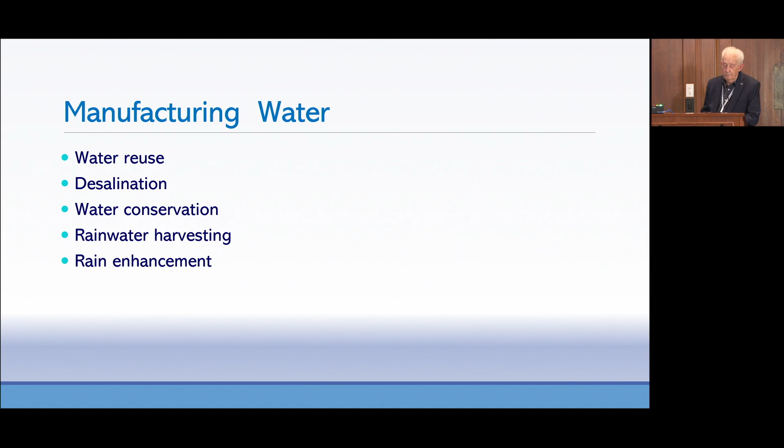So because of the growth of population and the growing need for water, there was no other choice for Israel but to look ahead and start manufacturing water. So we have a big water manufacturing factory, which is the most major contributor to it. It started with water reuse.

The Shafdan, which is the largest source of wastewater for irrigation, started around the end of the 70s, and many hundreds of small projects followed in different regions and areas for water reuse. Also in the cities, urban water reuse has been developing, like in my town, Herzliya. There is a very nice park which is irrigated with reused water, and so in other cities around Israel.

There was a lot of marketing of water conservation, mainly at home, behavior of people. Water conservation found itself very efficient in Israel - a lot of small apparatus used in showers, toilets, and other places at home. But if you take the total amount being conserved or that could be conserved, it's not more than one big desalination plant, for example - but still the culture is being kept very, very nicely.

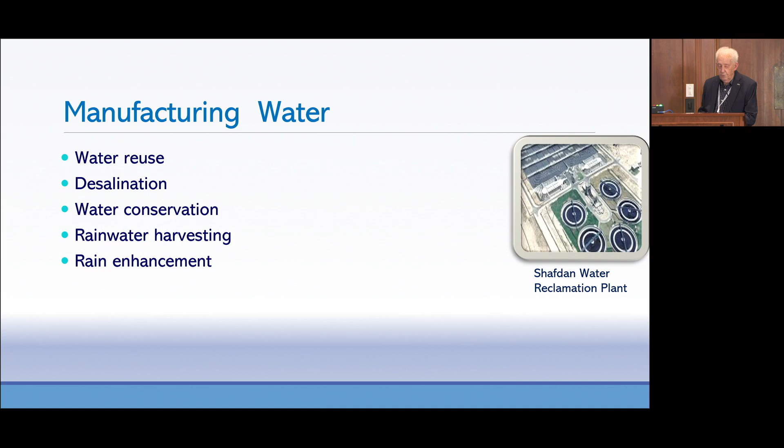There are also plenty of innovations, like taking water from the air, using different brines, even different types of sludges. But I would say most of the extra water comes from desalination. You can see here desalination and water reuse. The Ashkelon plant was the first one that started to work around 2004 or 2005, and not very far from there is a brackish water plant.

There are several, only very few plants like this, but again, as you can see here in the conference, there is work going on to get more and more brackish water desalination inland.

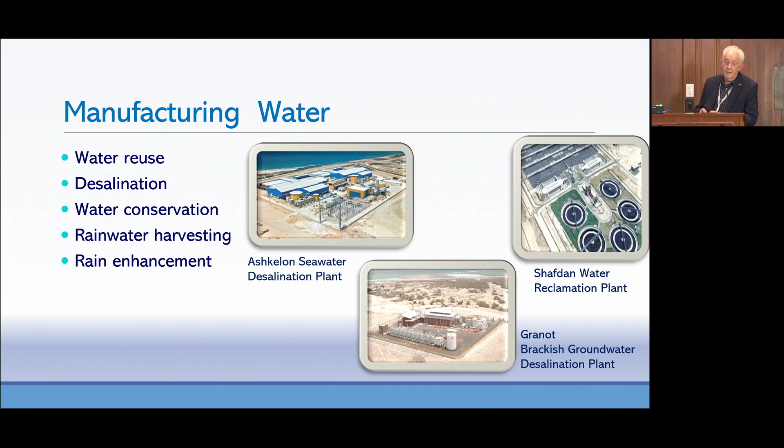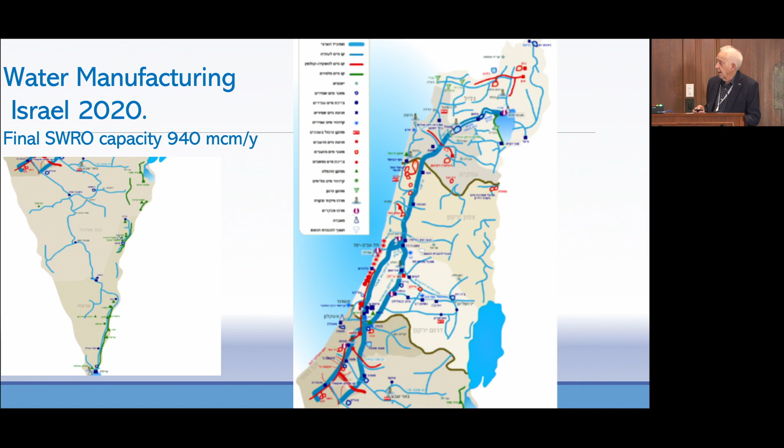Now you can see also what you see in red are different projects which reuse wastewater. The largest one is... where is that?

Tel Aviv is here, and the project of Shafdan starts from here. It collects the water from a population of about 2.5 million people, Tel Aviv and the satellite cities, and takes it down about 100 kilometers for a large area of irrigation.

Around Haifa in the north, there's also a project, much smaller, but still reusing Haifa and the Bay wastewater. And also Jerusalem, there is a reuse of some of the water to the east and some to the west. Near Beersheba, in the middle of the Negev, the south part of Israel, down to Eilat, there are different projects, but relatively small size.

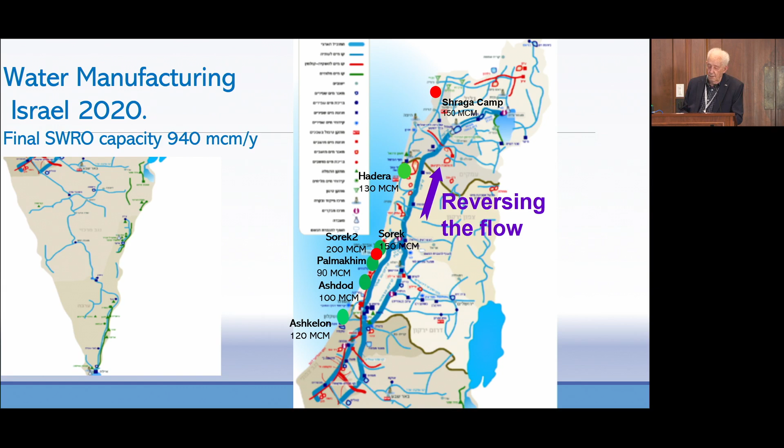Today, actually, in the past, before desalination started, most of the drinking water came about two-thirds from groundwater and about one-third from the Lake of Galilee, some surface water. Today, only the Galilee in the north gets water from the Lake of Galilee.

Now, if we look at the whole picture of what is going on in Israel, I think the best thing to do, and not only in Israel, would be to look in a holistic manner when we use, when we plan, when we invest in the water.

There are actually two cycles here. On the left hand, we have the inflow of water, or production of water, from rain, from desalination plants—there are some two big projects of surface water collection and injection—groundwater, industrial water, not too much but still exists, and the reused water. All together, they give the picture of the main water sources in Israel.

On the other hand, you have the contribution of wastewater, most of which is being treated for reuse at a pretty good level. We can see immediately in this picture that all of it is getting together. I mean, wastewater is being used for irrigation, and some of the water gets into the environment, into the ground.

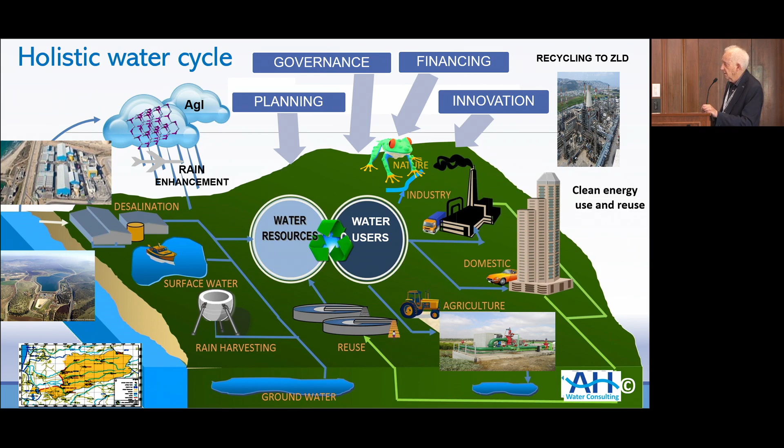Now, there are different contaminants in the water, similar to what you have here in the United States, and I don't need to go over every one, but there is a lot of care, I would say, about the water quality.

Today, some of the issues being brought here would be like microorganic contaminants. There are traces of medicines or hormones getting into vegetables, for example, very low quantities, but it's being investigated. PFAS is being investigated too, found in several spots in Israel. And all the rest, the biology, I think it's quite similar to what you have in the United States.

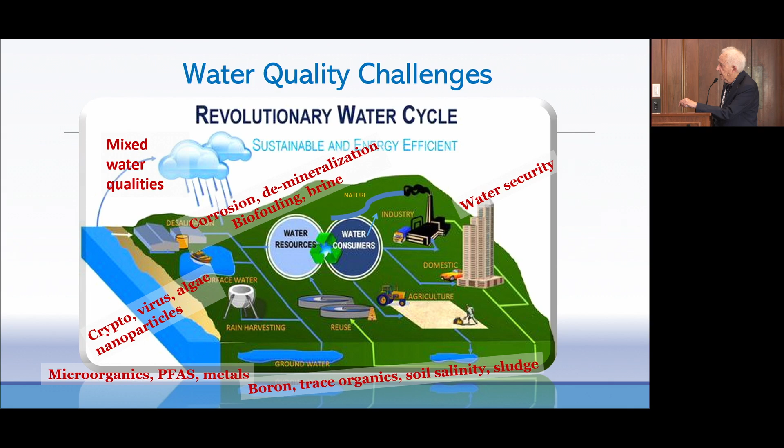Now, another subject that is very important in Israel is water security, and this has been taken care of in the last years. There are a lot of attacks from Iran and sometimes from Russian sources on Israeli treatment plants. In the United States you also have a lot of them. I looked at this topic too, and today there is special care on the topic of security. This has become an integral part of water management in Israel.

Now starting to talk about quality, one thing that was raised yesterday, and we had a very nice discussion, was the lack of magnesium and calcium in desalinated water. I mentioned it but didn't talk about it too much, but there has been research showing there is not enough supply of magnesium and calcium. In fact, even before desalination started in Israel, the calcium level intended for health was lower than what the WHO has recommended. This is a problem that is taking time to solve because of different obstacles, mainly money and, I would say, conservatism.

Another thing I'd like to point out, which also relates to climate change, is that in these years climate change can be very quick, fast and unpredictable. We are in an era of uncertainty. For example, there was a big drought in Israel, and there was not enough water for irrigation in the north of the Negev. So there was no other choice but to irrigate with desalinated water that came from the desalination plant in Ashkelon.

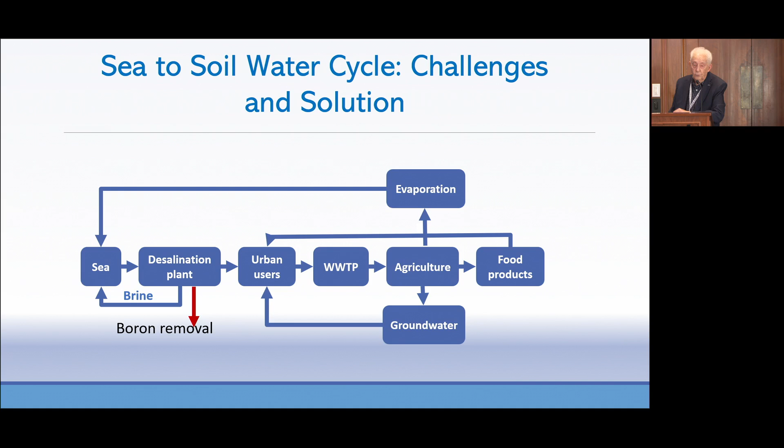This is a planned scheme of one of the cycles we see in desalination. You can see that from the sea, the water is desalinated, gets mostly to urban use, but after using it, it gets into the wastewater system and then goes to the wastewater treatment plant. There is no addition of magnesium, not at home and not in the wastewater treatment plant. It then goes for irrigation, and the plants don't receive the magnesium. Part of the water evaporates, part goes into the ground, and part goes for food, which lacks magnesium—this is a kind of internal cycle that happens.

Now, to get a solution for it, boron is removed, and remineralization happens to the water coming out of the desalination plant. It goes through calcite stone to give enough calcium to protect the pipes from corrosion, and it's also a good addition for the human body. There are limits, but the pH is being amended, and then it goes out without any addition of the magnesium that the body—our pipes in the body—need.

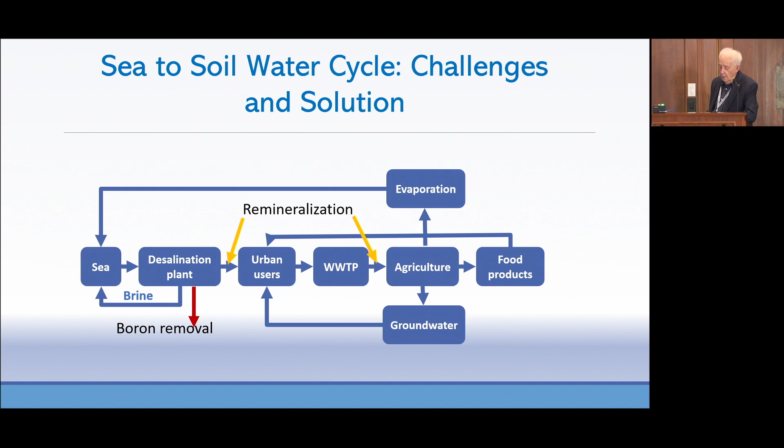I will say one word about monitoring. I didn't see much about monitoring in this symposium, but there are a lot of smart monitoring devices that have been developed in Israel. They are being used also in the United States, all over the world, and it is very helpful in order to manage such a complicated system.

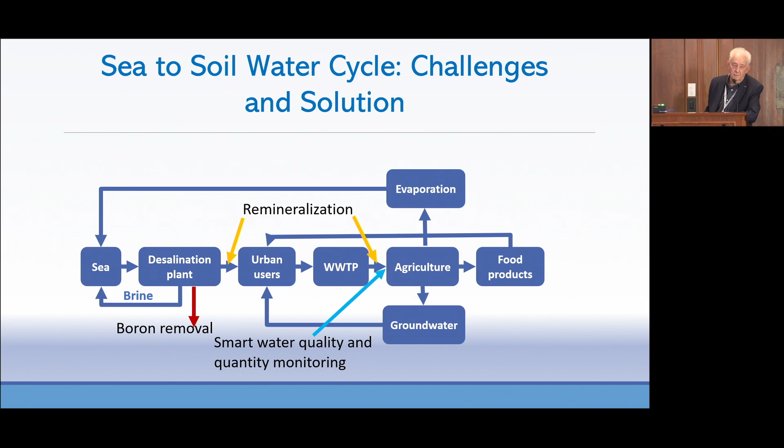I think we already saw the importance of water quality in this whole cycle. Actually, it's the regulation, the standards, that today dominate the management of water supply and wastewater reuse. This is because we have solutions, not in any country. In Israel, the sea is, I would say, like an endless source of water. Wastewater there's always, and it's growing, population is growing, but the quality is dominating today, which is a very big difference from the last century.

In the last decade, several amendments and advancement of regulation have been set up: water quality for irrigation, wastewater quality for disposal to streams, industrial effluent quality, drinking water quality, and desalinated water quality. And there are continuously standards being used for materials and equipment, mostly under the Israeli drinking water standards.

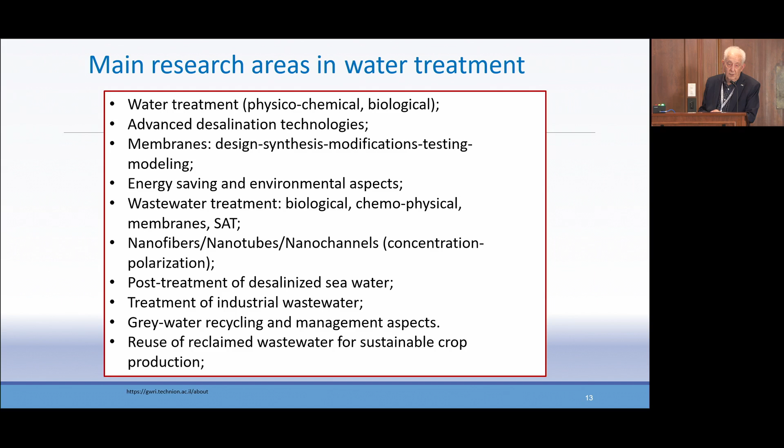So grey water has been also researched in Israel, and I think we are encompassing all what can be in water to treat it or try to treat it properly and have standards assigned to it. Now, Ministry of Science assisted me in getting more information. Although I'm sitting here and there on some committees, I looked at the whole picture. Each year or a couple of years, depending on the grant, there are calls for research proposals.

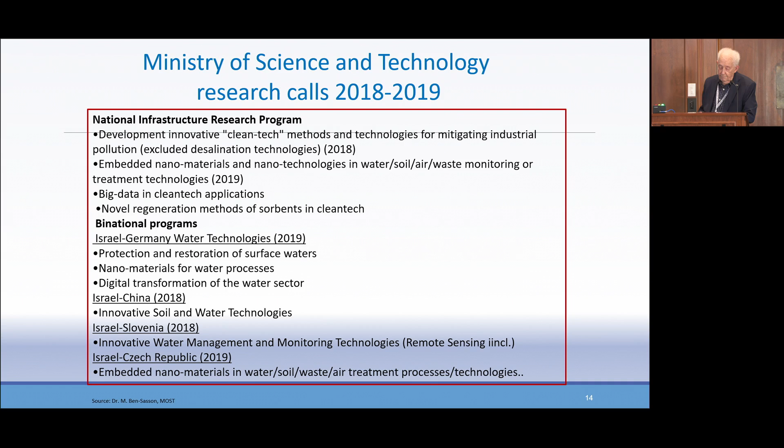I would say some of the best proposals for scientists are given in a program of national infrastructure. It's good, mostly good for young researchers, but also for everybody. And then there are binational programs. With the US, we have several funds—maybe I'll go to the next slide.

I'll show it later, but with the US there are several funds, including the binational Israel-US grant, and the agricultural fund—just forgot the name—BARD, and there's also BIRD with the industry. There are several ways, and there are also possibilities to apply for grants from other associations, like I participated in two investigations with people from Berkeley and from Texas and others by getting grants from the Water Reuse Association.

So there are a lot of resources that one can follow. Now, the main institution—there's a lot of research going on in different places, but the main institutions performing water treatment are, of course, the big universities like the Technion, Ben Gurion, Hebrew University, Tel Aviv University, the Weizmann Institute, not too much, but they do. Then Volcani Institute of Research, Tel Hai College, which now stops working, Kinneret College has been developing quite nicely, and Mekorot, the National Water Company, also funds research, mostly very, very applied research.